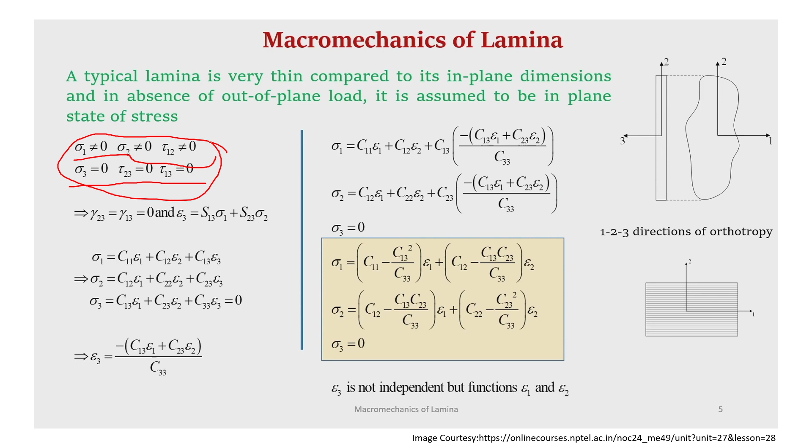Considering this assumption, we can say that sigma 1, sigma 2, and tau 1-2 will be non-zero, whereas sigma 3, tau 2-3, and tau 1-3 will be equal to 0. By using these assumptions, the initial stiffness matrix that we had can be further reduced so that we have only 4 independent constants to solve our equations with. This is the reduced stiffness matrix, as you can see.

Initially this was known as the stiffness matrix, which considers 6 variables on the right side and 6 on the left side. Then we further reduced it, considering that the thickness is so less that in that direction there is no property change. So now this is known as the reduced stiffness matrix, where we are only considering sigma 1, sigma 2, tau 1-2, and similarly epsilon 1, epsilon 2, and gamma 1-2.

So these are the equations from which, using the values of the coefficients in the stiffness matrix, we can find the values of the reduced stiffness matrix coefficients, and how these reduced stiffness matrix coefficients are related to the engineering constants. So these are taught. Now let's discuss some sample questions for assignment number 3.

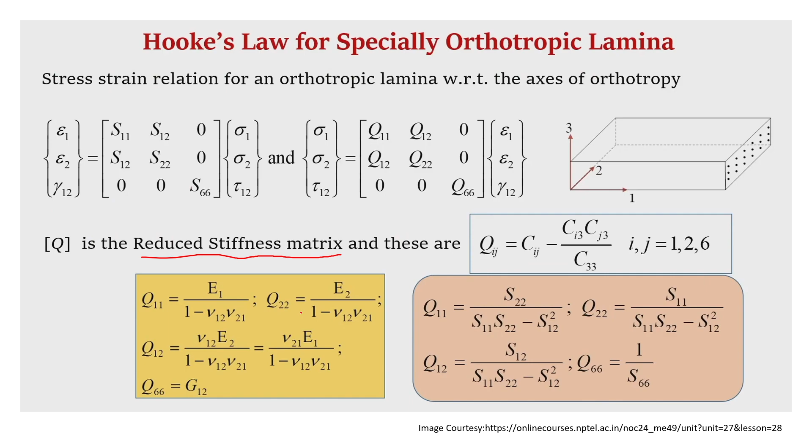The first question is: a unidirectional lamina is... This question we have already tackled in previous assignments or live sessions, but now that we are starting with a lamina, the first question came considering the definition of a lamina. So a unidirectional lamina is heterogeneous and anisotropic. As you can see, a lamina is nothing but a single layer of fiber, that is the reinforcement, combined with a matrix. So a single layer which has only one layer of reinforcement and a matrix around it forms one single lamina, and this lamina will be heterogeneous and anisotropic.

Heterogeneous means the properties are location dependent. At any point in this whole lamina, if you point at any location, it can have either the reinforcement part or the matrix part. So it is not uniform, the properties won't be uniform. That's why we are calling it heterogeneous.

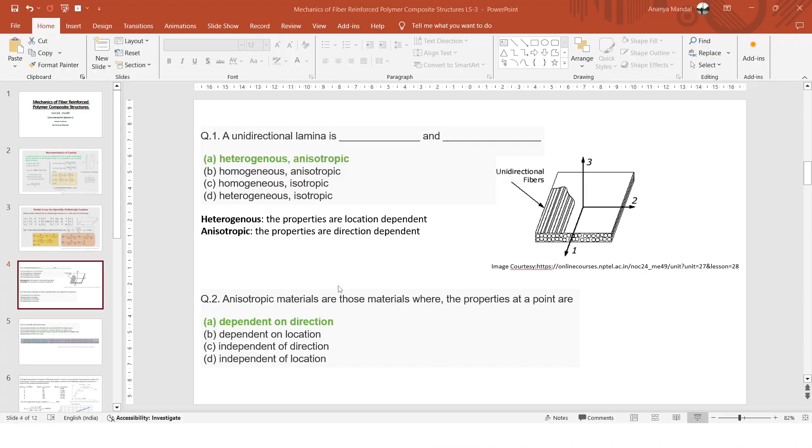The analysis axis is, suppose we have a lamina and we use the universal principal axis, that is x, y, z. So we consider the x, y and z direction for a certain lamina. But the lamina's properties change depending on the alignment of the reinforcement. So the reinforcement fibers, however they are aligned, the properties will be different accordingly. If they are aligned parallel to axis x, that property will be different; parallel to y, that will be different. But still x and y can be replaceable if it's a single lamina.

So if it's a single lamina and it's either at 90 degrees or 0 degrees, you can decide for yourself which one to consider as x, y, z. But if it is more than one layer of lamina forming a laminate, then you have to fix x, y, z as your particular axis, and accordingly you will get the material axis for all these laminas.

So now what is the material axis? It is considered when the reinforcement is aligned at different angles. At that time, we consider the direction of alignment of that reinforcement as the material axis, because the stress withholding capacity of that lamina or reinforcement will be highest in the direction of its application. Suppose the reinforcement is at 45 degrees; then in that 45 degree angle, the stress borne by that lamina will be highest. So we consider that as material axis 1, and accordingly, 90 degrees to that we give axis number 2 and axis number 3.

So when initially we are considering a lamina, it can be at 0 or 90 degrees, which we can't decide in advance, and it can be either general or specially orthotropic lamina, because both xyz and 1, 2, 3 can coincide with each other.

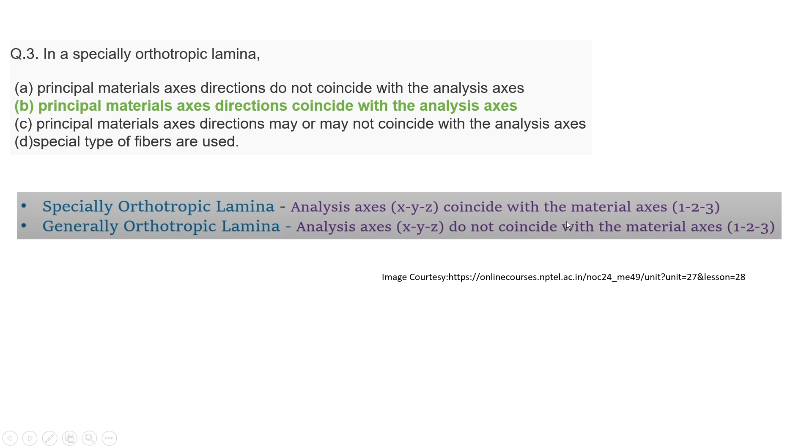But if we are talking about an angled lamina, where the reinforcements are at an angle, or when we talk about laminates with more than one lamina having different angles with respect to each other, at that time we consider them as generally orthotropic laminas, and their particular axis will not coincide with the material axis. So in this question, they are talking about a specially orthotropic lamina. By definition, it is one whose analysis axis coincides with the material axis. So option B is the correct answer.

Now the next question is that in a UD glass epoxy lamina, that is a unidirectional glass epoxy lamina, it is loaded in a UTM along direction 1. So in direction 1, it is getting stress, and corresponding to increasing stress values, the strains along 1 and 2 are recorded using two strain gauges mounted on it. The following readings are obtained.

Obtained. So 1 and 2 represent the principal material directions. So stress in direction 1, values are given in megapascal, and the strain values are using strain gauge they have calculated in the UTM, so the values given are sigma 1 and epsilon 1 and epsilon 2 values.

Now they have asked, question number 4, that the longitudinal Young's modulus is. So longitudinal here, as the force is in direction 1, so we will consider that as the longitudinal force, and in direction 2 it will be the transverse force.

So all these terms should be clear whenever you are solving the question, what those terms mean. So longitudinal here means that as the load is applied in direction 1, so that will be the longitudinal direction, and 90 degrees to that, in direction 2, will be the transverse direction for this particular case. Now they are talking about Young's modulus.

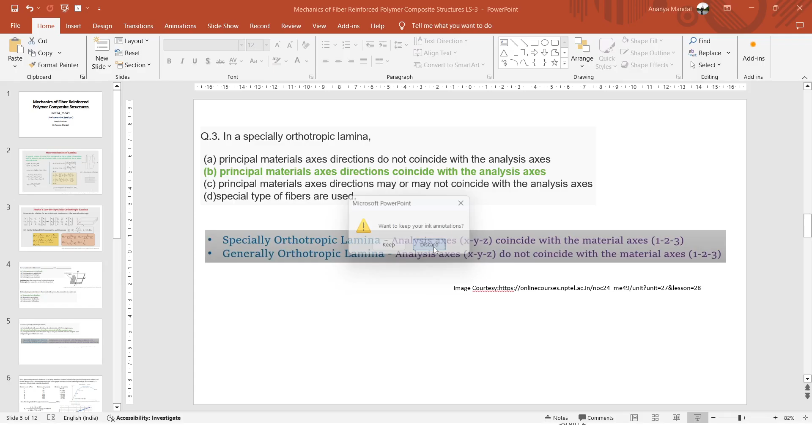So either you can form the graph of strain 1 and strain 2, that is epsilon 1 and epsilon 2, and you can get the slope of it, or if it is a linear graph like you can see here, then you can take the ratio of any two of the values, like here I took the value of minus 18.75 divided by 75.

That will also give the value 0.25. Or you can take the slope of this curve, if it is a linear curve, and it will give you the same value.

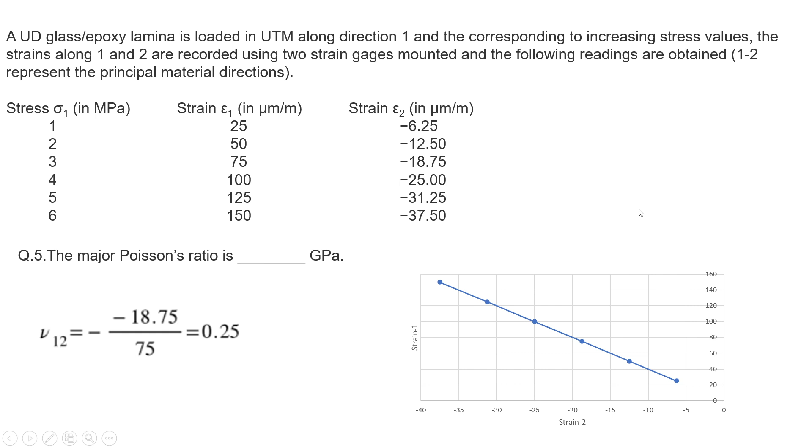The next question is, for the same data, if the lamina is now subjected to biaxial normal stress, that is sigma 1 and sigma 2 equal to 2 megapascal, then the longitudinal strain is epsilon 1. We have to find the value of epsilon 1.

So with the help of this compliance matrix, you can find the equation for epsilon 1. That will be epsilon 1 equal to 1 by modulus 1 into sigma 1 minus Poisson ratio nu21 by E2 into sigma 2, and this value will be multiplied by 0, so all the other terms will become 0.

So this will be the final equation for epsilon 1, that is sigma 1 by E1 minus nu12 sigma 2 by E1. Now this E1 value, which is the longitudinal modulus, and the major Poisson ratio, we have already solved in the previous two questions.

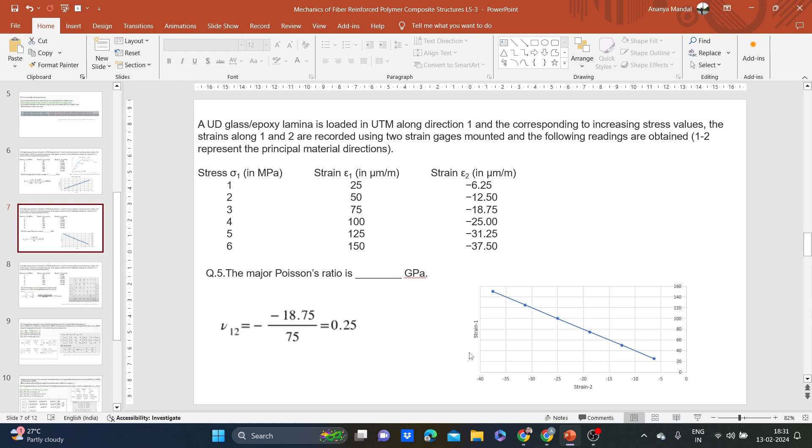Wait, I think there is some problem in this compliance matrix. It has to be sigma 2 upon E2, not E1. So then in that case, how do we calculate E2? We don't have E2 calculated yet. Sigma 2 by E2, new, nu 1 2 upon E1 is equal to nu 2 1 upon E2, like that. We can calculate from that formula.

This equation is incorrect. E1 should be E2. But since sigma 1 and sigma 2 are both similar, that's why I'm considering E1 will be equal to E2. That's why the correction in this equation is that it should have E2.

So sigma 2 upon E2 has to be there, right? Yes, sigma 2 by E2 will be there. But as you can see, sigma 1 and sigma 2 are similar, that's why we are considering that E1 and E2 will also be equal.

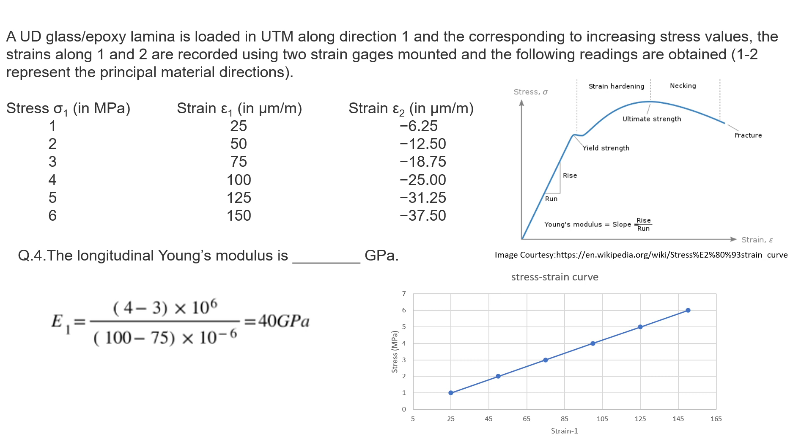Sigma 2 and sigma 1 are 2 MPa. Because in the tutorial, I think sigma 1 and sigma 2 are not the same, but in the assignment they are, that's why we have to calculate E2. As sir said, we can calculate using nu1 2 and E2, that relation. There is an equation between major and minor Poisson ratio and E1, E2 also, so from that we can calculate.

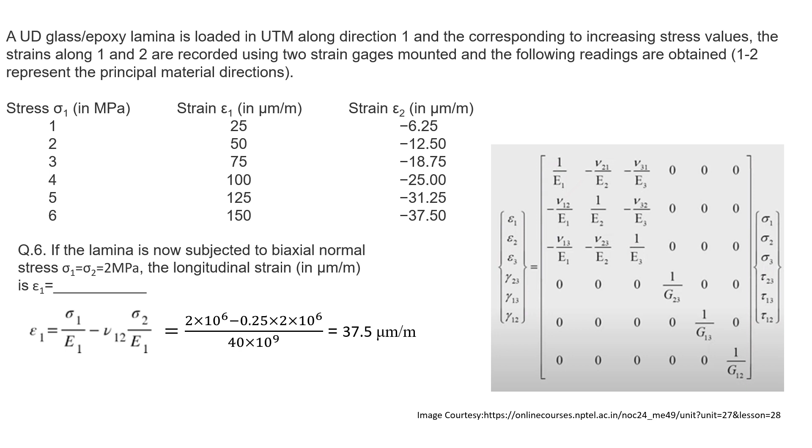Okay, thank you ma'am. Actually I didn't even notice this mistake I made, I'm so sorry. No no, I will try to attend. I thought I was considering it wrong, that's why I asked you. I didn't even notice this one. Thank you so much for pointing it out.

But ma'am, if sigma 1 is not equal to sigma 2, then how will we calculate E2? That's what we just said. There is an equation between E1, E2, nu1 2 and nu2 1. So from nu1 2 and nu2 1 we can find the major and minor Poisson ratio from the data, and E1 is already known, so from that we can find the value of E2. Remember in the last class also there was an equation between Poisson ratios and E1, E2, so we can use that.

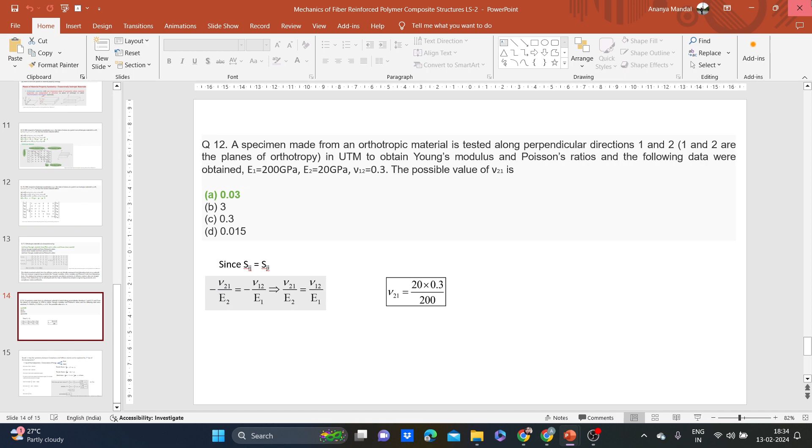Okay ma'am, I can try to find that equation. This equation was there, remember the relation between E1, E2, nu2 1 and nu1 2. So we know mu values and E1 value, from that E2 can be found. So if they are different, but in this case sigma was the same, that's why we can consider E1 equal to E2.

Okay, should I continue? Yes, yes ma'am.

So the next question is question number 7: the engineering constants in the principal material directions for a typical glass epoxy lamina are given as E1 equal to 40 gigapascal, E2 equal to 10 gigapascal, nu12 equal to 0.25, and G12 equal to 5 gigapascal. If the lamina is subjected to a uniaxial tensile stress of sigma 1 equal to 2 megapascal along the longitudinal direction 1, find the strains in mu m by m induced.

So here we have already given the engineering constants in the principal material direction, and we know the relation between the coefficients of the compliance matrix and the engineering constants. So first we will write our reduced compliance matrix. Here it is given that only sigma 1's value is known, that is 2 megapascal, and all the other values we are considering as 0. From that we get the relation: epsilon 1 will be equal to S11 sigma 1, epsilon 2 will be S12 sigma 1, and gamma 12 will equal to 0.

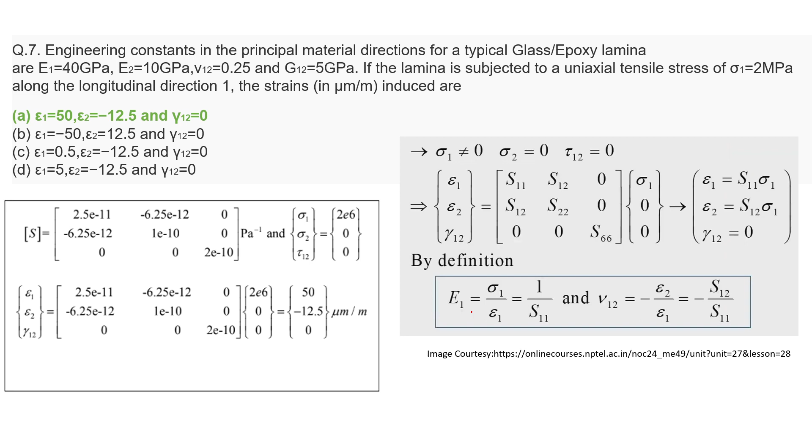This will be a very lengthy question. From the previous question we already got the values of S11, S12, S22 from the engineering constants given in the question. After getting this reduced compliance matrix, we use these equations to transform it for the given angle, giving the transformed reduced compliance matrix. Then we put the conditions given in the question for stress and strain. If we are given the values of stress, we can find strain using the compliance matrix; if we are given strain and need to find stress, we use the transformed reduced stiffness matrix.

So next question for the same data is that the global strains induced in a 45-degree glass epoxy lamina when only sigma y equal to 1 megapascal is applied, with sigma x and tau xy equal to 0. So we will use this newfound transformed compliance matrix, the reduced compliance matrix, for this case also. We have solved till here. Earlier, sigma x was taken as 1; here in this question sigma y is equal to 1, and we solve for the epsilon, the global strains.

And the next question is the global strains induced in a 45-degree glass epoxy lamina when only tau xy equal to 1 megapascal is applied. It's similar to what we already got with this matrix. We will use it again here by changing the stress, which will be a shear stress of 1 megapascal. So putting that value with this matrix, we can get the value of the strains.

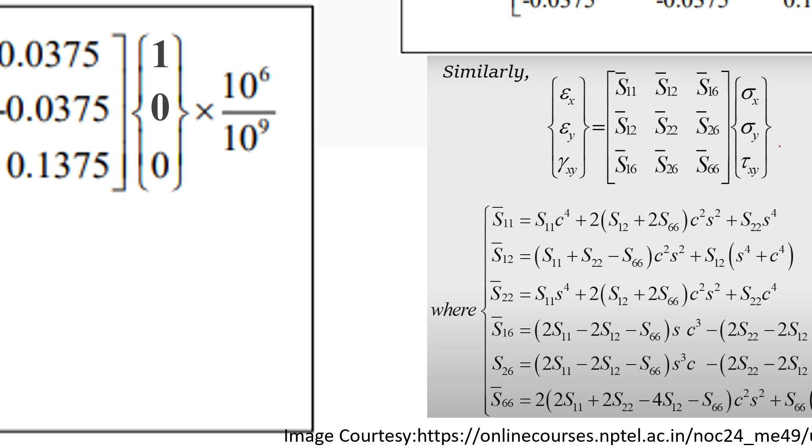And this, again this 10 raised to 6 by 10 raised to 9, how did you calculate that, 10 raised to 6 by 10 raised to 9? Because we have to find the strain in terms of micron, that's why.

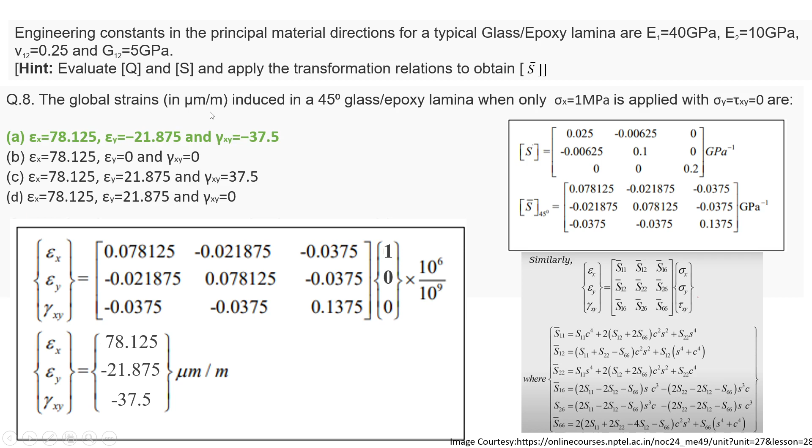So take these values, they will be in gigapascal, that will be 10 to the power 9, and epsilon values will be in micron, so that will be 10 to the power minus 6. So when it goes to the other side, it will become 10 to the power 6. GPa is pascal into 10 to the power 9.

Okay okay okay, but ma'am, I think you should sit and do some dimensional analysis and check it once. Okay, yeah, I never checked it for the units, but you check it once, I will also do it. If it is still coming out wrong or anything, we can discuss in the next class. Okay, then can I share my mail ID so that I can convey my doubts, because when I'm solving this assignment, there is one more issue in question number 8.

In question number 7, it has been asked to find the value of sigma 2 for the lamina. Epsilon 1 is already given, and we have to calculate sigma 2. When I'm calculating this, for any value of sigma 2, I'm getting that epsilon 1 value, so I'm a little bit confused.

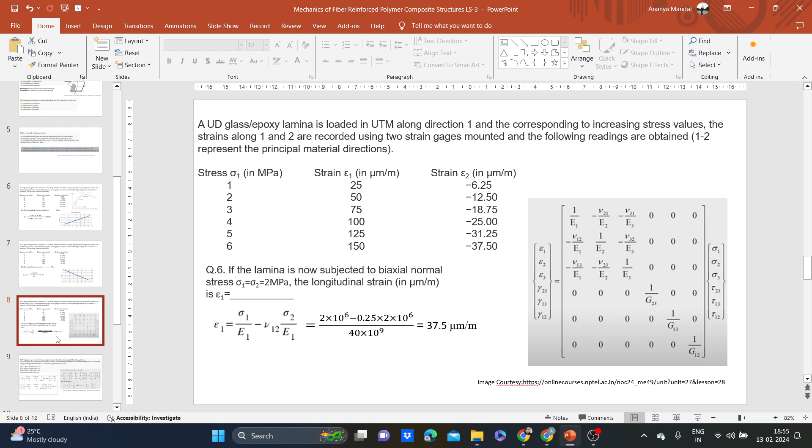As you can see in the question, what is given? We have given E1 and E2, and also sir taught in the class the relation between these coefficients and the engineering constants. I think initial slides also have this, so there is a relation between all these coefficients and the engineering constants. This was just an easier way to explain how you can correlate this with the engineering constants when all these values are 0.

This is the compliance matrix, not the stiffness matrix. But ma'am, here also S22 is not given, the Q matrix is given. How to calculate this Q11, Q22 and all? Similarly, if I want to get S22, I'm not getting how to calculate that.

Now that I'm saying from the definition, you just go by the definition, right? From this table, what you can see, what will be the equation for epsilon 2? Will be for getting that if you want to get S12 into sigma 1 and S22 into sigma 2. Likewise, and these terms are zero. So S12 sigma 1 plus S22 into sigma 2.